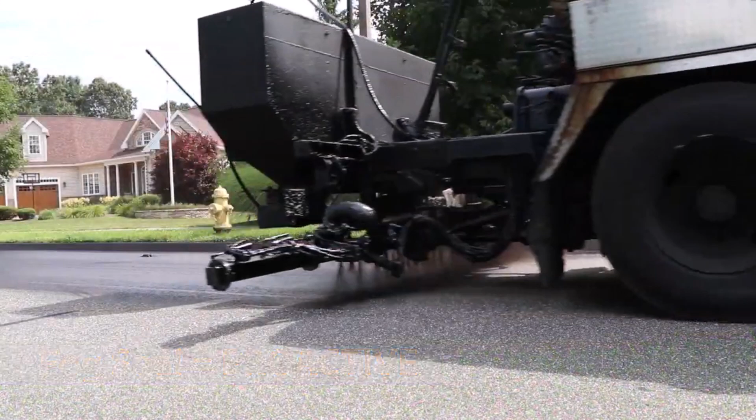Fog seals are used by many of the best pavement managers to reduce long-term life cycle costs. By proactively applying fog seals to newer pavements in good condition, we can minimize and delay the amount of surface cracking, oxidation, and raveling that requires more expensive repairs. Establishing a program to reapply the fog seal every 2 to 4 years can postpone the need for costly milling and repaving.

Asphalt-based materials can seal small cracks from water intrusion and shield the surface from damaging UV rays. Rejuvenators are used to soften the aged and hardened asphalt cement, restore flexibility, and reduce cracking. A light dusting of black angular aggregate is broadcast over the fresh fog seal to maintain safe surface friction.

Our experienced crews perform work in a neat, professional manner and are usually able to restore traffic to the treated roadway within 1 hour. Don't wait for cracking and other damage to occur before treating your roads. Proactively apply fog seals to good pavements to keep them in good condition and save taxpayers money.

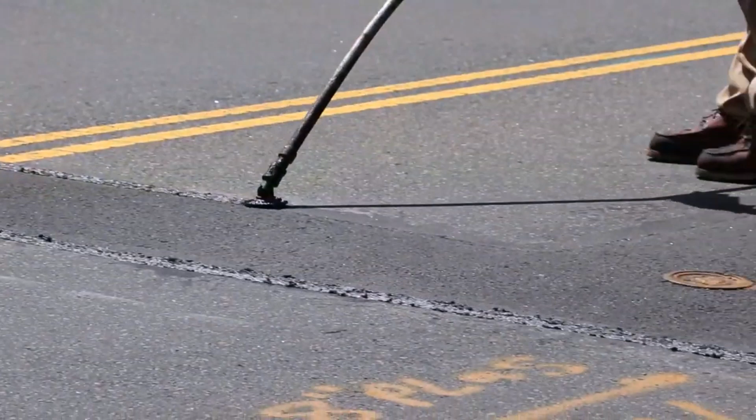Crack sealing is widely considered to be the most cost-effective preventative maintenance tool available today. When installed in a timely fashion, crack sealing can easily extend the life of a road by 2 to 5 years at a relatively minimal cost. At Indus, we pride ourselves on offering the highest quality, longest-lasting crack seal treatments in the Northeast.

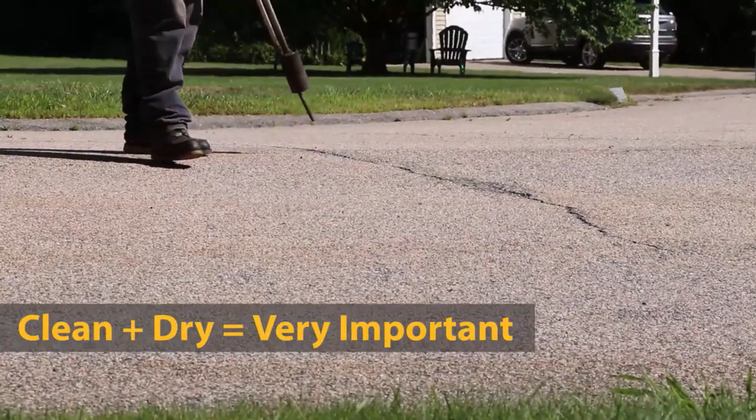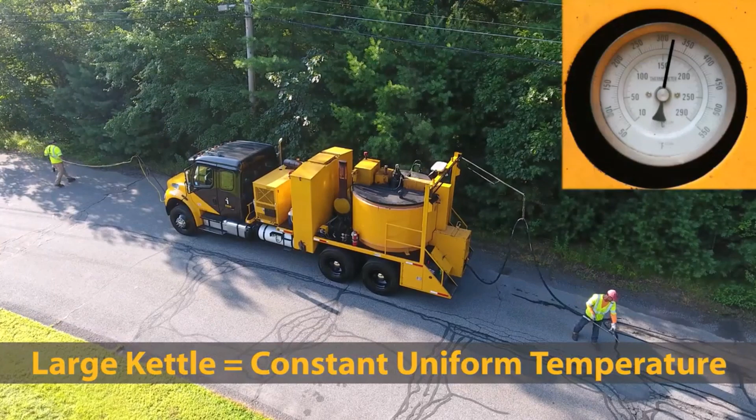Our certified installers know crack preparation is critical to sealant success and use hot air lances and high-velocity compressed air to do the job right. Maintaining the sealant at a constant, high temperature is essential to the sealant's durability. Our custom-built trucks allow our crews to keep over 1,000 gallons of material uniformly heated.

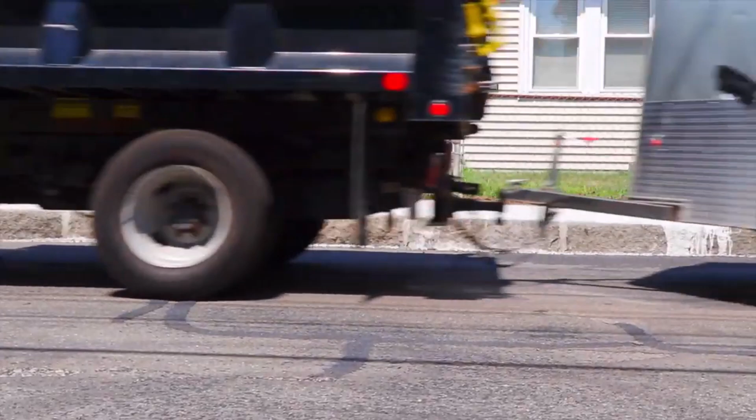The modified asphalt sealants we use are usually blended with reinforcing fibers and are designed to perform over a wide range of pavement temperature extremes. Our certified installers apply a liquid or granular detack agent over the freshly applied sealant so that traffic can be restored quickly. By keeping water and incompressible materials from entering and damaging the pavement, crack sealing is a vital tool that should be in every pavement manager's toolbox.

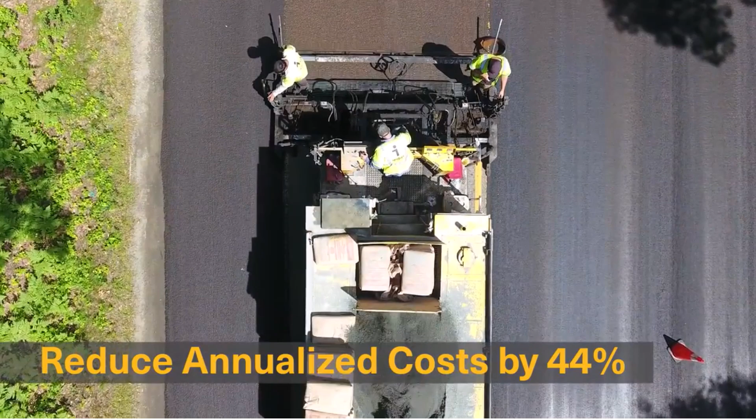Microsurfacing is a durable and cost-effective preventive maintenance tool designed to keep good roads in good condition. By applying this surface treatment before a pavement becomes too cracked and raveled, road owners can reduce annualized repair costs by as much as 44%. In 2018, Indus became the first AASHTO certified microsurfacing contractor in the U.S., and we use only the highest quality materials, modern equipment, and professional certified personnel to provide the longest lasting microsurfacing possible.

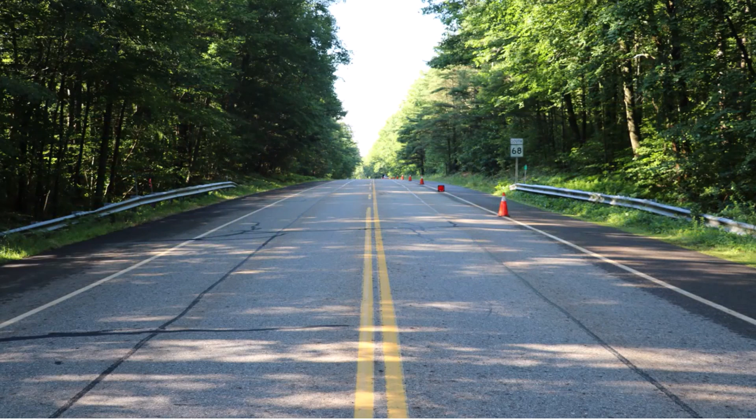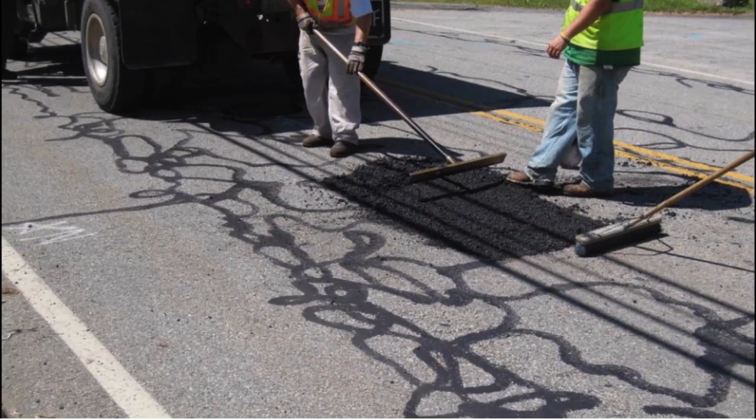For best performance, roadways selected for microsurfacing should have low to moderate levels of distresses. Preparation before microsurfacing usually includes patching repair of any isolated potholes or areas of fatigue cracking, crack sealing of any remaining cracks, removal of heavy pavement markings, thorough cleaning of the roadway surface, and masking of the utility castings.

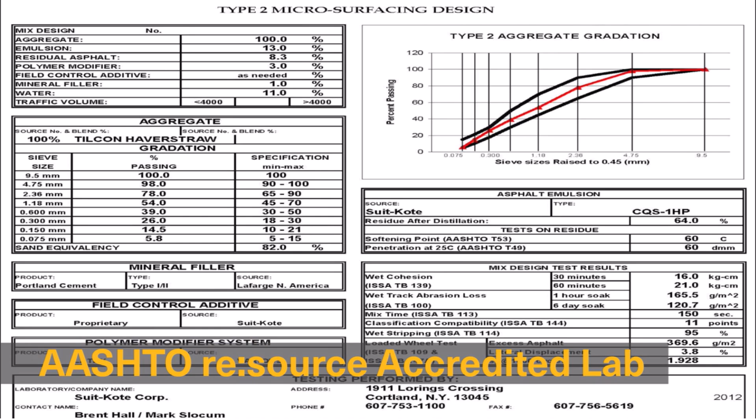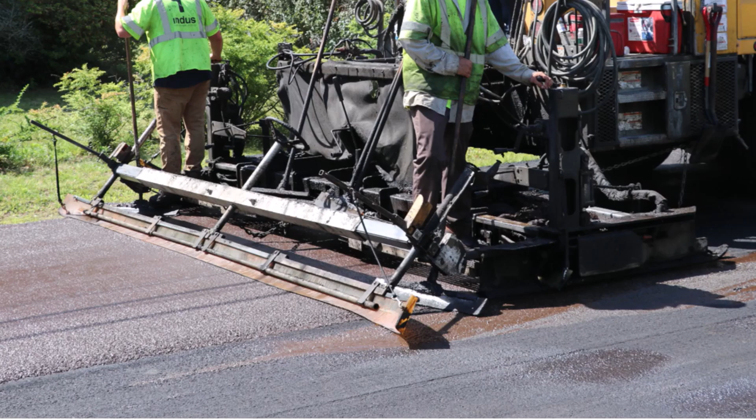The paving materials consist primarily of high-quality, 100% crushed aggregate and polymer-modified asphalt emulsion. Many of our microsurfacing clients are currently specifying emulsion with higher polymer content, referred to as HIMA Micro, for its added durability and longer service life. The aggregate, emulsion, and other ingredients are carefully proportioned and blended by our state-of-the-art continuous pavers based on project-specific mix designs which have been developed by an AASHTO-accredited lab.

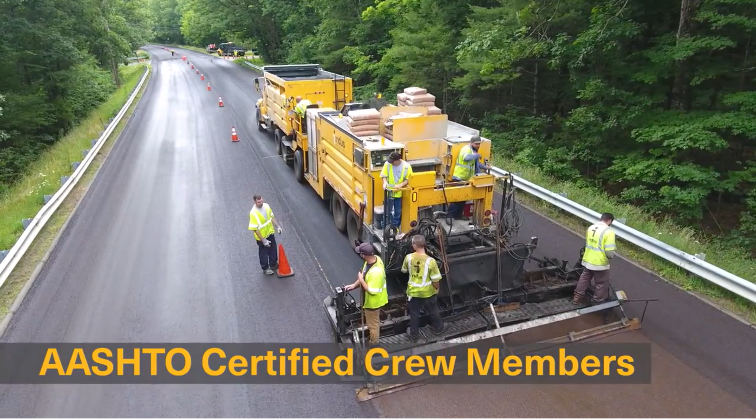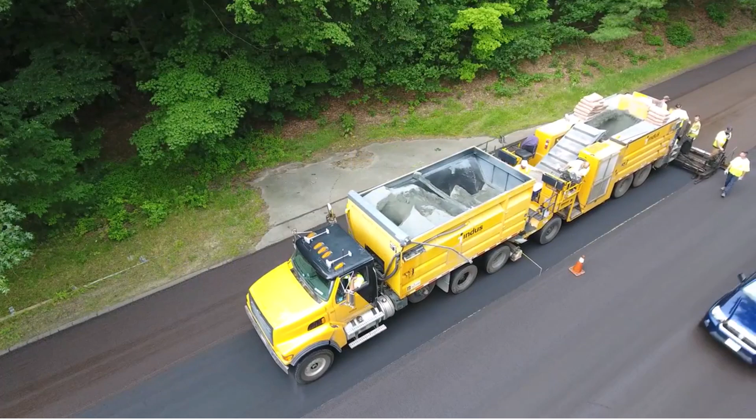Our micro superintendents and key personnel on the crews are also AASHTO certified and follow a rigorous quality control plan on each and every job to ensure our clients receive the best workmanship possible. Quick chemically setting emulsions allow a fast return to traffic, usually less than 1 hour, and also allow nighttime applications where appropriate. Most microsurfacing applications are pavement preservation projects done in 2 passes, starting with a leveling course, which can solve minor rutting issues, followed by a wearing course.

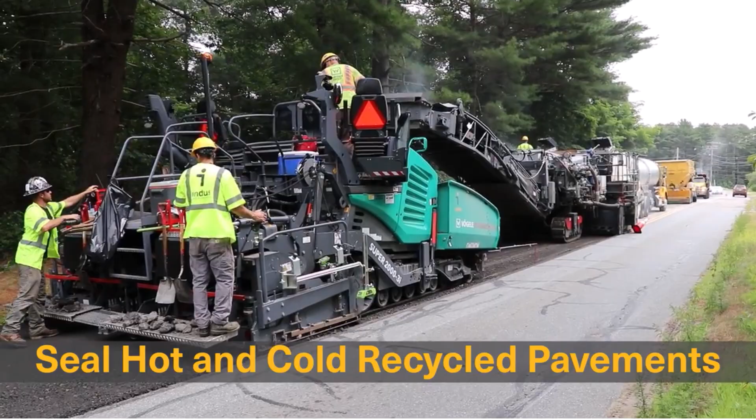With a total combined thickness of about 3/8 of an inch, these thin lifts minimize the loss of curb reveal and eliminate the need to adjust most utility structures. Microsurfacing can also be used to seal and provide a wearing surface over hot and cold recycled pavements, as the wearing course over hot mix leveling and binder layers on more major rehabilitation projects, and over chip seals as the second phase of the 2-step Cape Seal process.

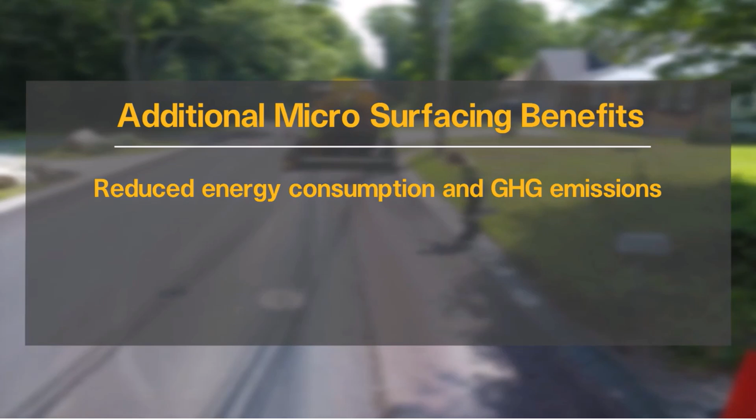Additional benefits of using microsurfacing include reduced environmental impacts, a smooth, black, aesthetically pleasing appearance, and increased skid resistance to improve safety. But the primary reason the best pavement managers use microsurfacing is to stop moisture intrusion and stop UV damage, which leads to raveling.

By taking this proactive approach to cost-effectively protect pavements and extend roadway life by 6 to 10 years, agencies can achieve substantial savings and reduce the frequency of costly milling and repaving.

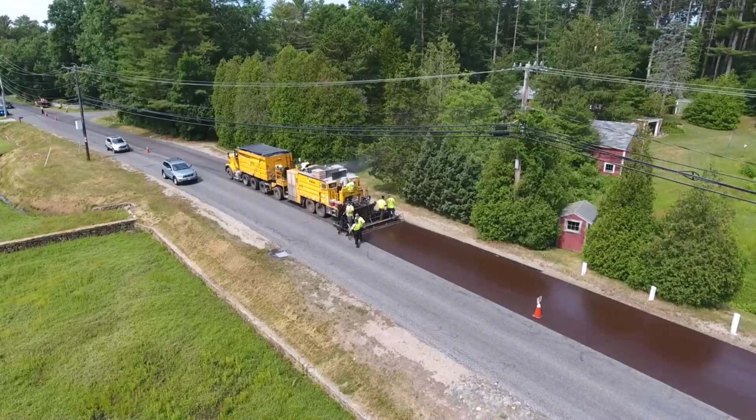Cape seals are a 2-step combination treatment for cost-effectively restoring moderately distressed pavements. Step 1 of the Cape seal process is the application of a chip seal, and Step 2 is covering the chip seal's exposed aggregate with a microsurfacing wearing course.

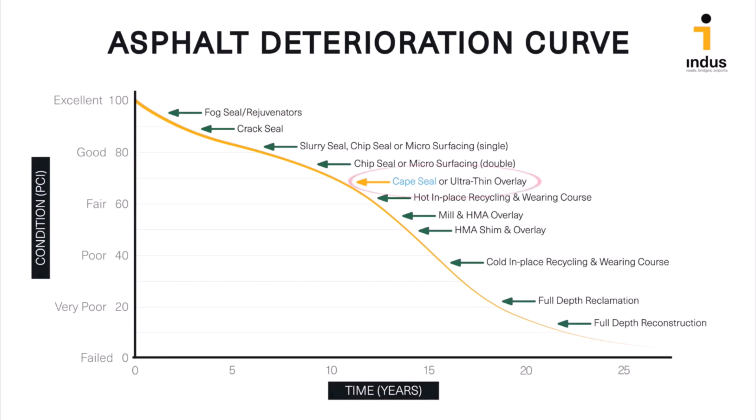Originating in the 1950s in the Cape province of South Africa, and thus the name Cape Seal, this composite solution is becoming increasingly popular as communities search for more economical alternatives than traditional mill and fill. Cape seals are most appropriate on roads rated in fair to good condition and are often used in lieu of hot mix asphalt overlays and shallow mill and fills.

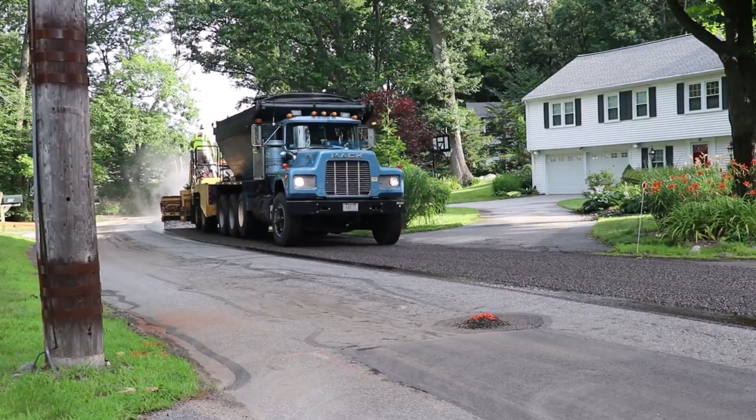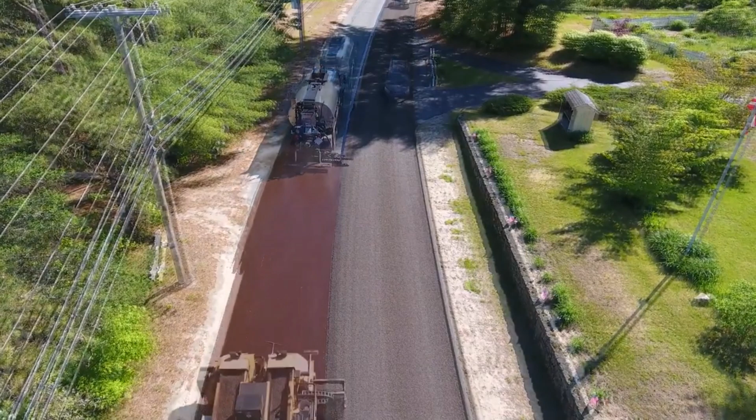On moderately distressed roads like this, where either a chip seal or microsurfacing treatment alone might not be adequate, the two-layer composite Cape seal system with its flexible chip seal interlayer is a cost-effective solution that can be expected to provide 8 to 10 years of service life extension.

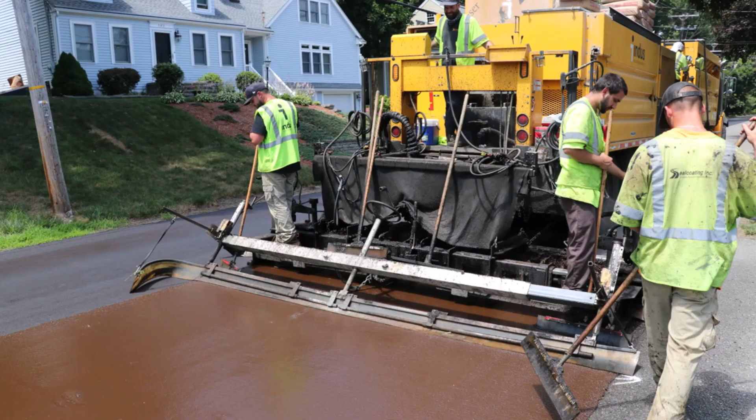Before starting construction of Cape seals in residential areas, it is always a best practice to notify homeowners of the upcoming work and to let them know the coarse texture of the Phase 1 chip seal will be covered and smoothed over with the Phase 2 microsurfacing.

The chip seal is constructed by applying a layer of asphalt binder over the existing pavement, immediately followed with a layer of embedded crushed stone. The binder liquid may be either an asphalt emulsion or a hot applied asphalt cement, both of which are highly effective at sealing surface cracks and stopping oxidation and raveling.

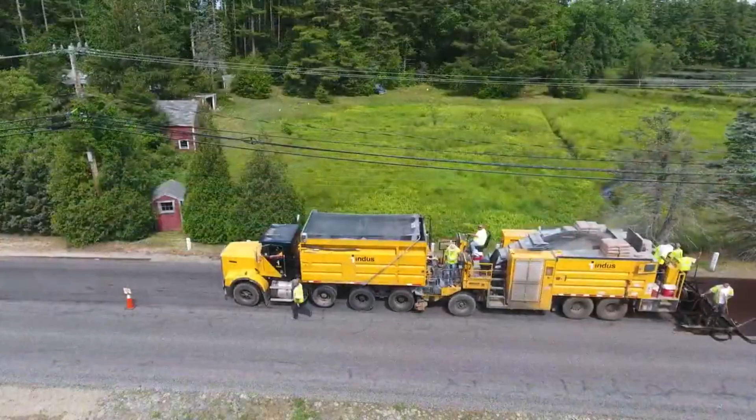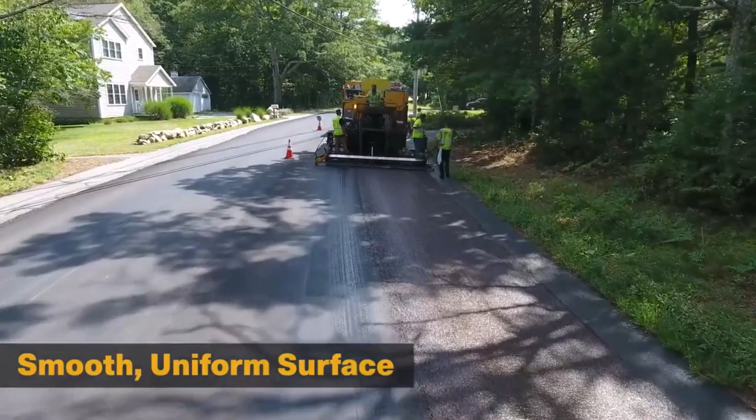After the chip seal is cured and swept, the microsurfacing can be installed in 1 or 2 lifts, fully covering and locking in the chip seal aggregate. On higher traffic roads or roads where the wheel path rutting needs to be corrected, 2 lifts of microsurfacing are generally used. By combining these 2 treatments, Cape seals offer roadway owners the restorative benefits of a chip seal with the smooth, uniform, and aesthetically more pleasing benefits of microsurfacing.

Additional benefits of the Cape seal treatment include quick return to traffic, minimal loss of curb reveal, reduced environmental impact, excellent skid resistance, and delayed surface cracking. But the primary reason more and more communities are using Cape seals is to stretch their limited budgets. If milling and repaving has become too cost prohibitive for you to achieve your roadway network improvement goals, consider adding Cape seals to your pavement management toolbox.

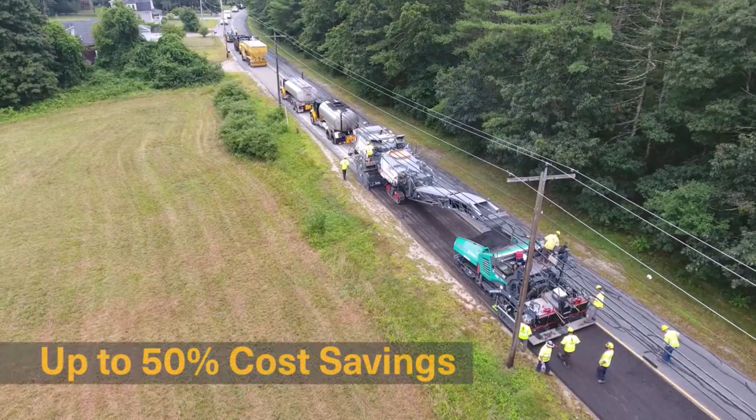Cold in-place recycling is a long-lasting solution for heavily cracked pavements, saving up to 50% of the cost of other repair options. When a shallow mill and fill won't keep the cracks from reappearing quickly, but full-depth reclamation is too expensive and too disruptive, cold in-place recycling may be the best treatment option.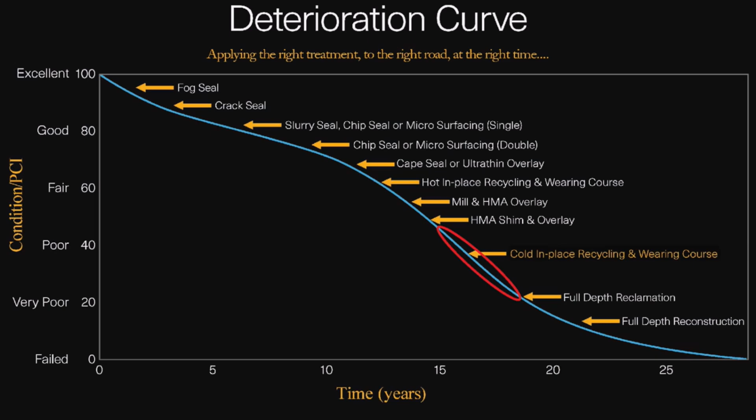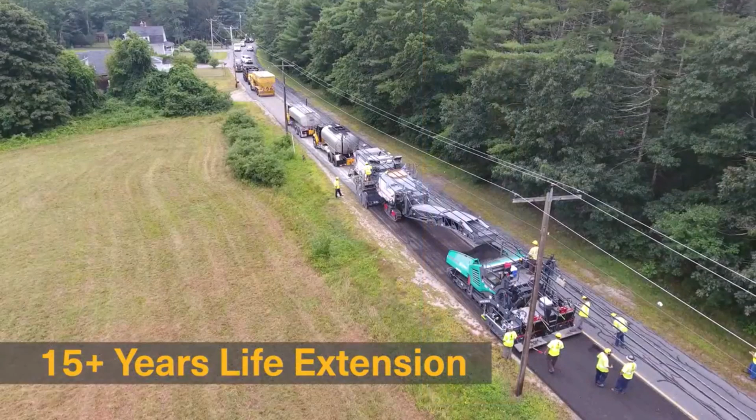By eliminating cracking and other pavement distresses up to 5 inches deep, cold in-place recycling is a durable rehabilitation process that can add 15 years or more of new service life to a road. CIR is an engineered solution designed to not only save money, but substantially reduce environmental impacts. By reusing our aggregate and petroleum-based natural resources, the recycling process can reduce energy consumption and greenhouse gas emissions by as much as 90%.

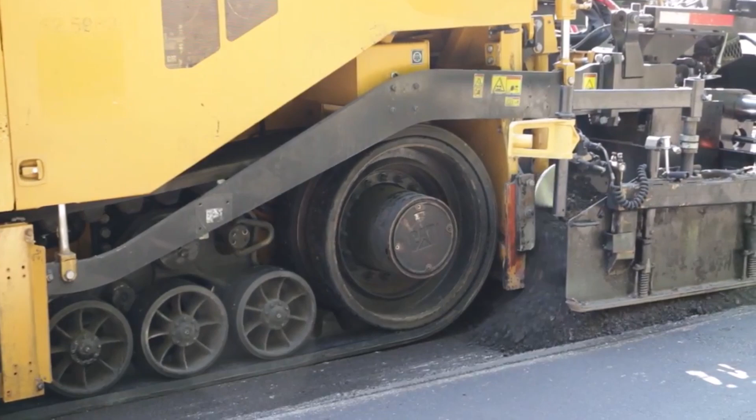Indus does cold in-place recycling with foamed asphalt, which offers 2 distinct benefits for our clients. One is faster curing time to more quickly allow traffic and installation of the wearing course. And 2 is an advanced particle adhesion technique that slows the rate of reflective cracking.

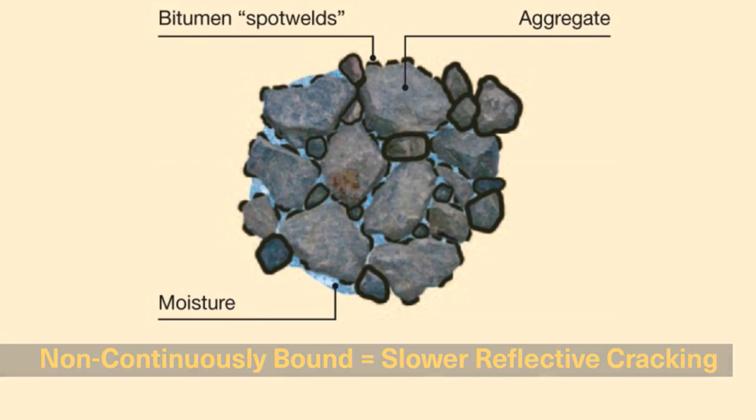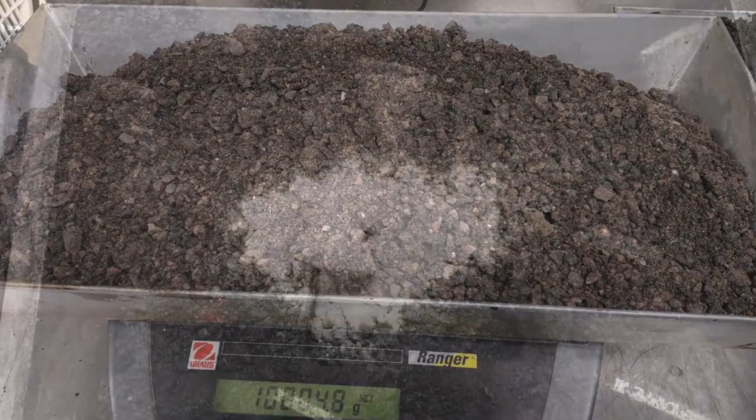Candidates for the cold in-place recycling process are cored extensively to determine the appropriate recycling depth. These cores are then processed and analyzed by an independent, accredited lab to develop a job mix formula, which prescribes the proper amount of asphalt and Portland cement additives to be incorporated into the recycled pavement.

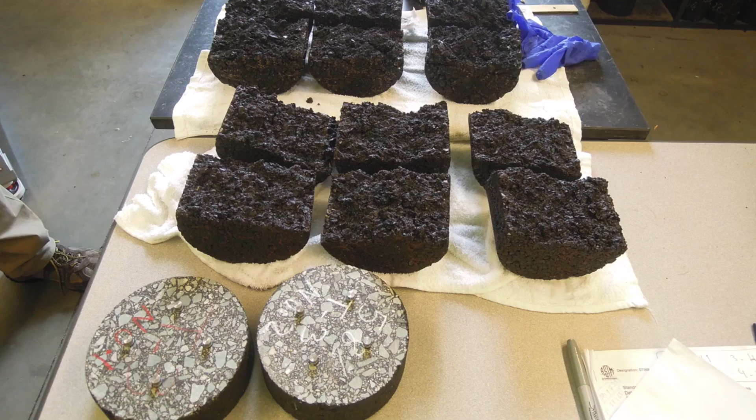By dropping and plating utility structures before recycling and then rebuilding them back to grade ahead of the wearing course paving, we construct a continuous and uniform recycled layer and eliminate the pavement problems often found around older manholes and catch basins.

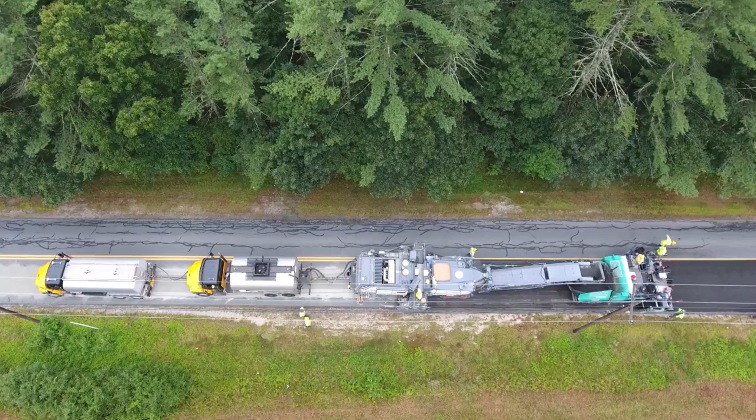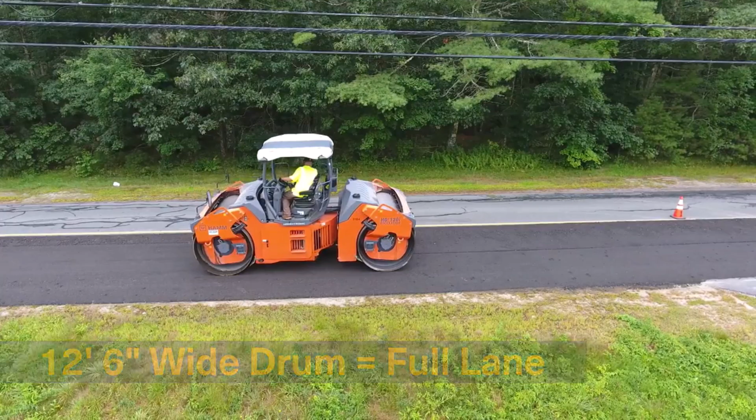Indus uses only modern, state-of-the-art recycling, paving, and compaction equipment to perform this work. Our 12-foot, 6-inch wide milling drum and continuous equipment train allow us to efficiently recycle a full lane width in one pass to minimize the inconvenience to motorists and residents.

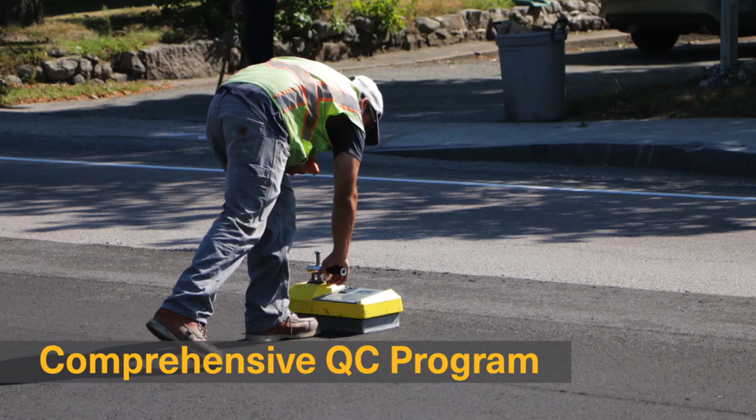To ensure the highest quality workmanship possible, our recycling team is continually monitoring each step of the recycling process, including the mixed compaction densities throughout the day. Once compacted and ready to be reopened to traffic, a light fog seal is applied to the recycled surface to seal out moisture and reduce raveling until the finished wearing course is applied.

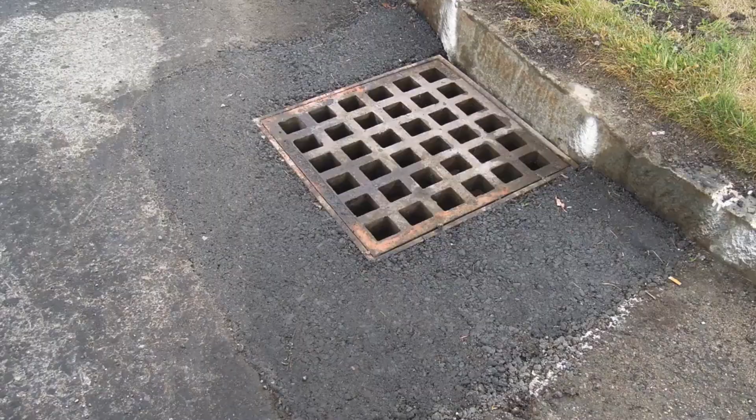After raising any structures back to grade, a wide variety of different wearing courses can be utilized, ranging from surface treatments to hot mix asphalt overlays depending on the road's structural requirements, pavement height restrictions, traffic, and neighborhood type.

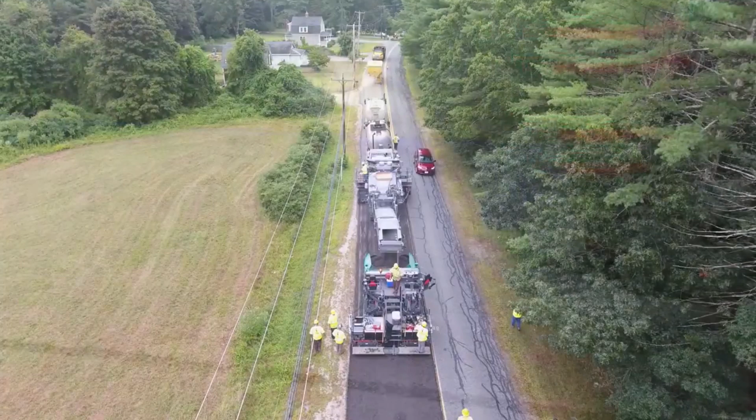Cold in-place recycling technology has rapidly advanced in recent years, and if saving up to 50% of the cost of full-depth reclamation or deeper milling and repaving is important to your roadway stakeholders, consider adding CIR to your pavement management toolbox.

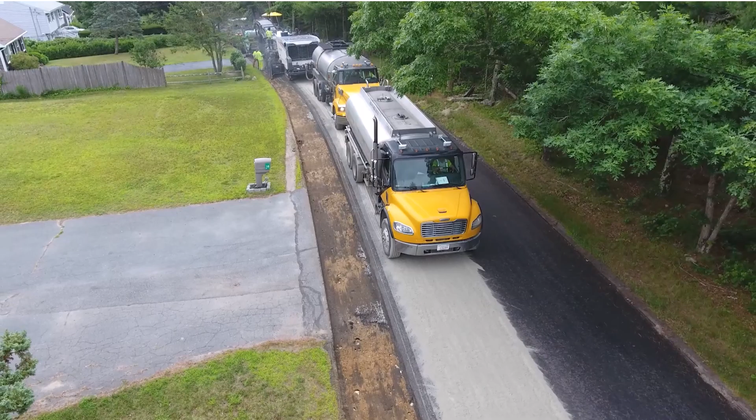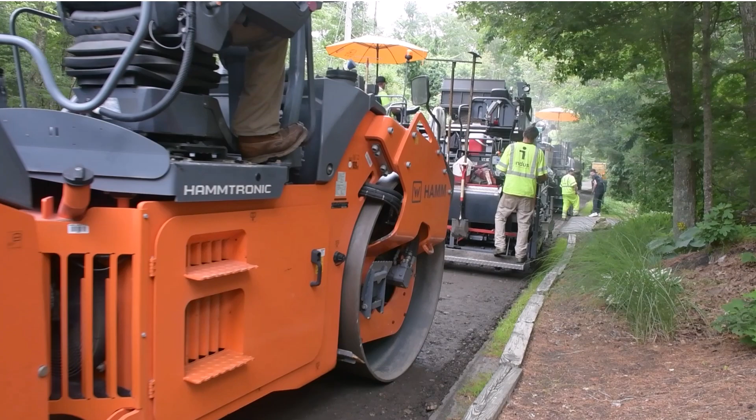Stabilized full-depth reclamation, SFDR, is a long-lasting solution for heavily distressed roads where traditional mill and fill or unstabilized FDR will not provide adequate strength. When traditional, unstabilized FDR with 4 or 5 inches of new pavement on top is too expensive and too disruptive, paver-placed stabilized full-depth reclamation may be the best treatment option.

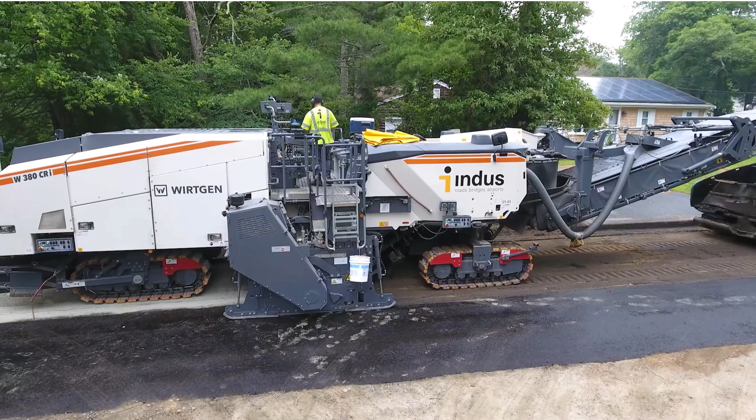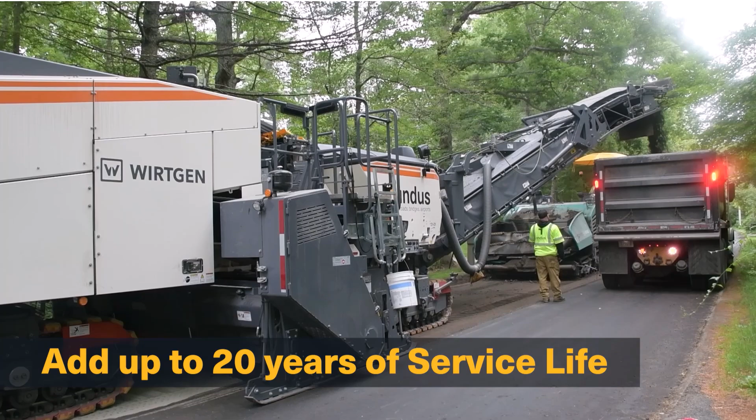By strengthening a weaker subbase and increasing the overall structural capacity, paver-placed stabilized full-depth reclamation up to 8 inches in depth is a durable rehabilitation process that can add up to 20 years or more of new service life to a road. Paver-placed SFDR is an engineered solution designed to not only save money, but substantially reduce environmental impacts.

By reusing our aggregate and petroleum-based natural resources, the recycling process can reduce energy consumption and greenhouse gas emissions by as much as 60%. Indus does paver-placed full-depth reclamation with foamed asphalt, which offers 3 distinct benefits for road owners. 1. Faster cure time to more quickly allow traffic and installation of the wearing course.

2. An increased structural benefit compared to milling and repaving or unstabilized FDR with new asphalt wearing surface. 3. Minimal disruption to the traveling public compared to traditional FDR that typically requires windrows and the use of a grader.

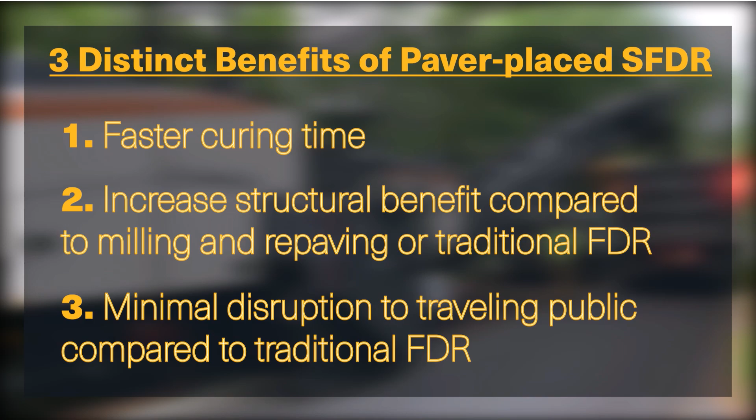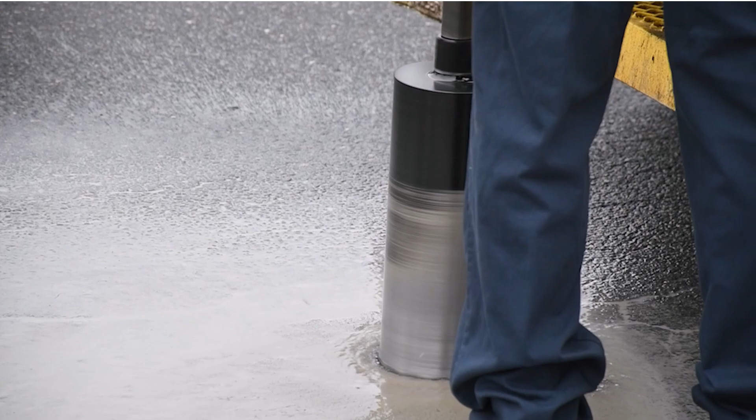Candidates for the paver-placed stabilized FDR process are cored extensively to determine the appropriate recycling depth. These cores are then processed and analyzed by an independent accredited lab to develop a job mix formula which prescribes the proper amount of asphalt and Portland cement additives to be blended into the pulverized pavement and underlying subbase mixture.

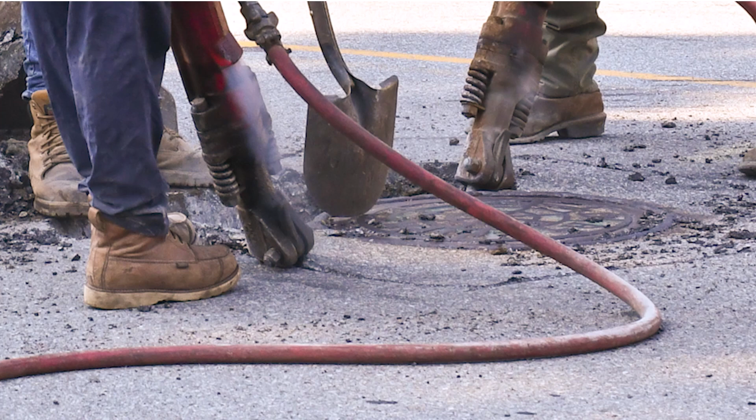By dropping and plating utility structures before reclamation and then rebuilding them back to grade ahead of the wearing course paving, we construct a continuous and uniform recycled layer and eliminate the pavement problems often found around older manholes and catch basins. Indus uses only modern, state-of-the-art recycling, paving, and compaction equipment to perform this work.

Our variable width milling drum, up to 12.5 feet wide, and continuous equipment train allows us to efficiently reclaim a full lane width in one pass to minimize the inconvenience to motorists and residents. To ensure the highest quality workmanship possible, our reclamation team is continually monitoring each step of the reclamation process, including the mixed compaction densities throughout the day.

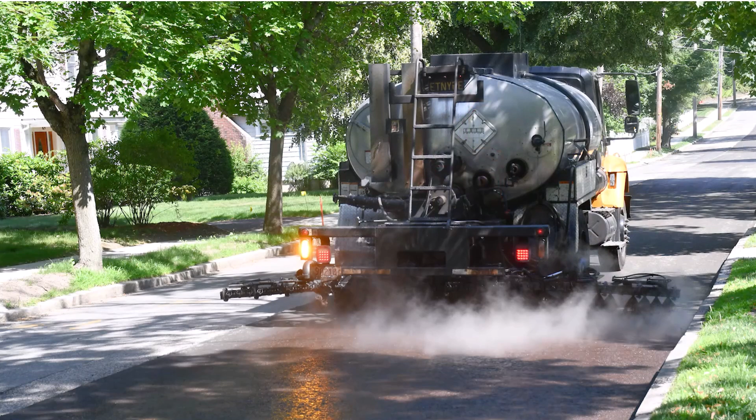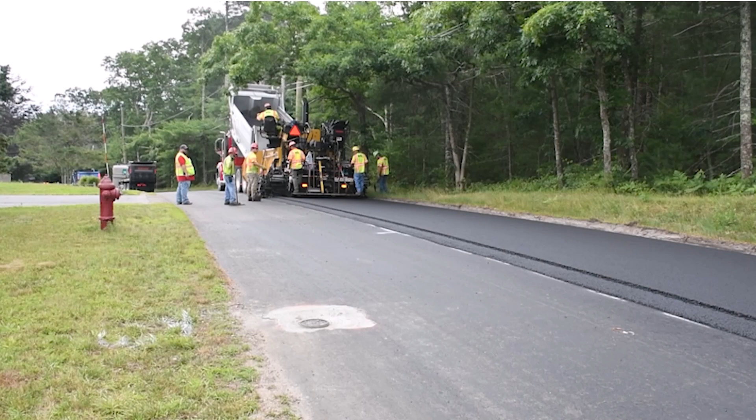Once compacted and ready to be reopened to traffic, a light fog seal is applied to the reclaimed surface to seal out moisture and reduce raveling until the finished wearing course is applied. After raising any structures back to grade, a 1.5 to 2 inch hot mix asphalt wearing surface is installed to match the required grades.

Paver-placed stabilized FDR technology has rapidly advanced in recent years, and if saving up to 15% of the cost of traditional FDR and reducing the disruption to your residents and the traveling public is important to your roadway stakeholders, consider adding paver-placed stabilized full-depth reclamation to your pavement management toolbox.